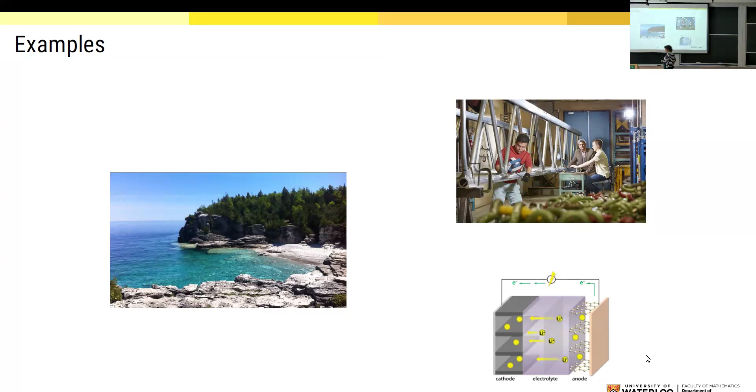And then this is a diagram of a lithium cell, which I did some work on a few years ago on estimation, and that's a really hard estimation problem. Again, we have really only a measurement of the voltage at the terminals, and you want to try and figure out what's going on with very complex electrochemical dynamics. These are actually all PDE examples, which is what I usually work on, but this is actually the last time I'll mention PDEs in this talk, because I realize that the whole estimation issue is really difficult.

So just as a basic problem description, and these are all really nonlinear examples. So I have some nonlinear system of ODEs, and I've got an initial condition, and I've got a measurement. And just for the sake of simplicity, I'll say the measurement Y is a linear function of the state X, but that's not important at all.

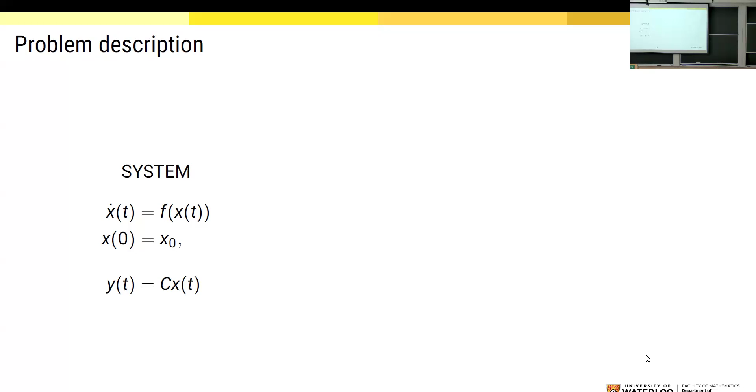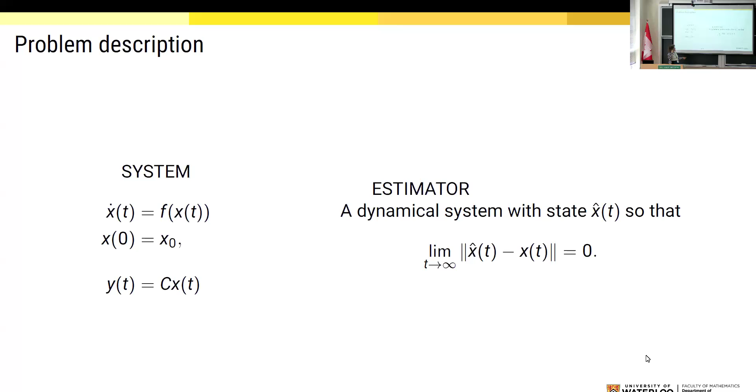What's an estimator? An estimator is another dynamical system which you construct in some way, which has some state X hat, and the key property is that as time goes on, the state of the estimator has to converge to the true state, okay? So the obvious thing to do, if you hadn't really worked in this field at all, was you'd say, okay, I have a pretty good model, so I'll just construct a model of the system and use that.

But this is terrible. First of all, if the initial conditions don't match, you're not going to get X hat to be an estimate of X, right? And if I knew the state at time 0, then I would probably know it at later times, and I wouldn't need an estimator. So this really doesn't work.

Also, can I forward on this? Yes, I can. It ignores the fact that I do have measurements. I don't know the whole state, but I do have these measurements, right? So you should use them.

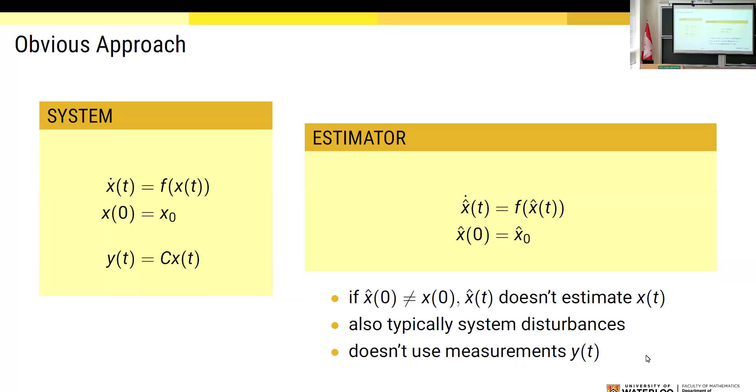So really the best result for doing estimation is for a linear system, which is well known in the systems field. Minimum variance estimator design. So I try and design so that I minimize the covariance of the errors, okay? And supposing I have linear dynamics, and also I have a nice setup. I have Gaussian noise, and the noise on the model and the noise on the sensors are independent, okay?

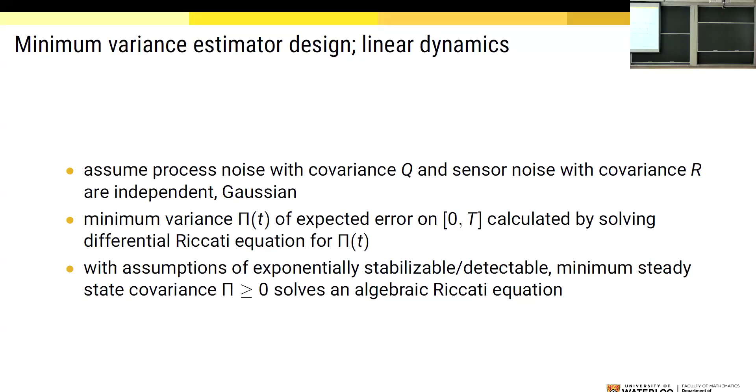This was solved around 1960 by Bucy and Kalman, and we can figure it out by solving a differential Riccati equation in finite time. And if you take it infinite time, you get an algebraic equation. At the time, there was a bit of skepticism because people were saying, you've replaced one problem I don't know how to solve by another problem I don't know how to solve, this algebraic Riccati equation. But now we can solve these with thousands of variables, and that's no longer considered really interesting. But this is what you get. So this is a nice setup.

Does this thing have a light on it? No.

So I have the noise, right? I have process noise, which would be like disturbances or allowing for errors in my model, and I have sensor noise, because no sensor is perfect, right? They always have errors, okay? And the optimal estimator, if I had nice noise and linear dynamics, has got this really nice form.

You've got really a copy of the original dynamics, and then it appears in this really nice form for free, even though we didn't pose it in the problem. For free, the optimal estimator is actually in feedback form. So I feed back an error between the actual measurement and the predicted measurement. And what you scale it by, this gain or filter here, you get from solving this algebraic Riccati equation.

And what is really important is that the error between the estimate and the true state converges to zero. In fact, it converges to zero exponentially, okay? So I'm not actually trying to construct a copy of the system. I'm not trying to identify the system. I'm trying to construct another system with stable error dynamics, okay? And we have that in this nice case, right? And the discrete time case is exactly the same. I just wrote it this way because it's a little easier to explain.

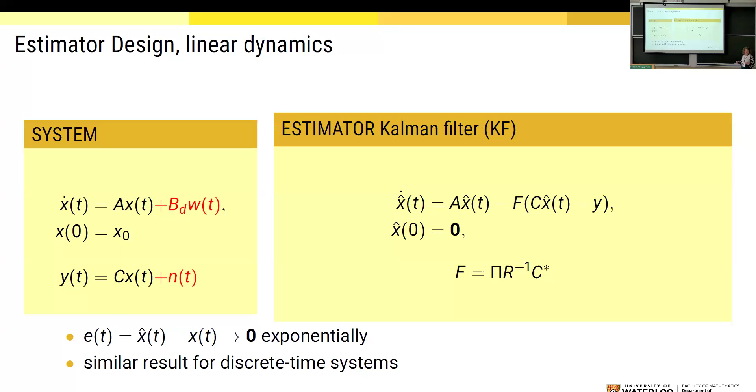You can do unscented Kalman filtering. There's a lot of other approaches, but they're a little on the ad hoc side. Another thing that people might commonly do is think, okay, I don't know the optimal form, but maybe I'll assume I'm going to feed back the error in the prediction, and I'll try and figure out the optimal F, okay? So there's a lot of numerical approaches, but not much in the way of theory.

So the long-term goal of my research at the moment is to improve state estimation for nonlinear dynamical systems, okay? And what I'm going to talk about now is using neural networks, particularly recurrent neural networks, to construct minimum variance estimators for nonlinear systems. So I'm curious, everyone here is very excited about using machine learning. Is this one of the problems where machine learning could be advantageous? I know there have been some really good successes in solving optimal control of nonlinear systems with neural nets, so it sort of indicates that estimation might be another one.

We did some earlier stuff. We looked at straight Jordan recurrent networks. Here we're going to compare a Jordan, a long short-term memory, and an Elman type to a traditional Kalman filter, just to see how they stack up. And we have some results on verifying the error convergence.

So a lot of people have been doing work using neural nets to predict states, okay? A lot of people will use only the data. They don't have a model, which is often what you have to do. You don't always have a decent model. And that's what we called in the old days system identification, okay? So it's a different kind of problem.

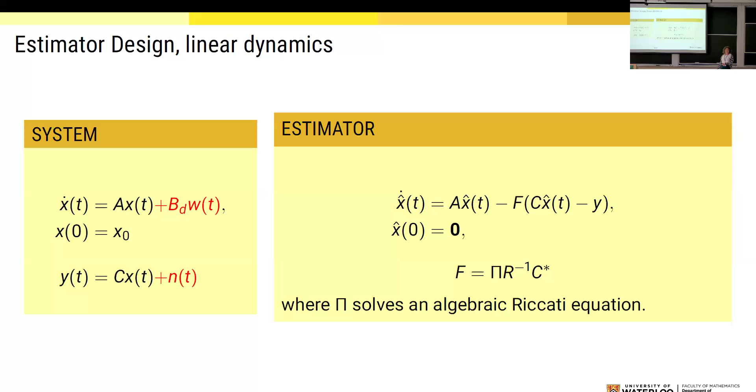So you tune it, again, using learning, okay? And I really found one paper, so someone was really using an optimal type approach, but using some theoretical results from Art Krener from about 20 years ago. But it's got a lot of assumptions. But I guess you'd call that a physics-based approach because it uses a Hamilton-Jacobi-Bellman equation.

What we did just here was we tuned the networks to minimize the error variance, okay? So the mean squared error of the estimate, which is a fairly straightforward problem. So the two architectures we looked at were Elman, which are pretty popular, and I'm just showing the straight Elman because the long short-term one is too complicated to draw.

What you do in Elman as opposed to a standard recurrent network is you take the hidden layer from the previous time step and update it. So you're sort of updating the hidden layers here. There's an approximation theorem, which Miroslav was just talking about. It works for dynamical systems, for ERNs. Yeah, and we're focusing on LSTMs because they should be a little more efficient for training.

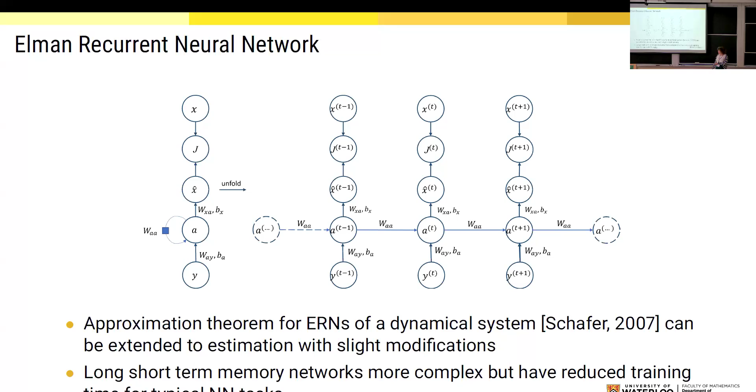A Jordan network is not as widely used, but we looked at that because it seems much more natural for a dynamical system. Because in a Jordan network, the recurrence is you're taking the output. So what's the output in the system? You're feeding it in the current measurement, right? And then it goes through the hidden layer, and then you get a predicted state, and then that is used to update the loss function, which is the sum of squares of errors, okay? And then we get a new predicted state, okay?

And in a Jordan network, that output from the previous layer, which is the predicted state, is used to update things, which is very much how a dynamical system works, right? The state is actually the memory of the system, and that seems a very natural update. So that's why we looked at that. Yeah, that's it.

So we just looked so far at 3 fairly standard and fairly simple examples. One was linear because we have the optimal answer to compare it to, the Kalman filter. And that's just a system of connected springs, and we discretized them. So we did the comparison to the discretized system. We're pretending the world is discrete time. So discretized springs.

So it's 10 second order systems, so it's 20 states, okay? And there's parameters, and then the measurement vector, we're assuming you could measure all the positions, but not the velocities. And of course, there's measurement noise on the measurements, and process noise is included in this. I just didn't write it in, okay?

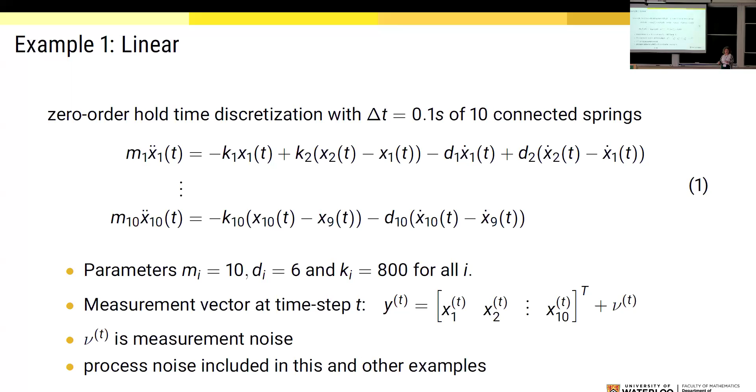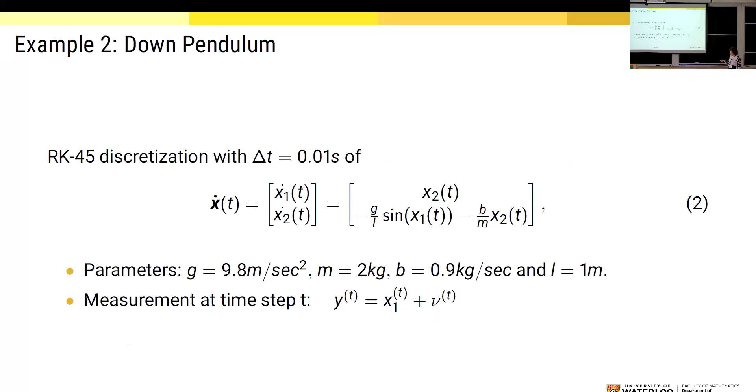The second example was another classic one, the pendulum, right? And we used Runge-Kutta 45 to discretize it. There's parameters, and the measurement is just the position, right, plus noise. And the third example was a reverse van der Pol oscillator. It's another second order system. Again, we just measured the position, a noisy position measurement, okay?

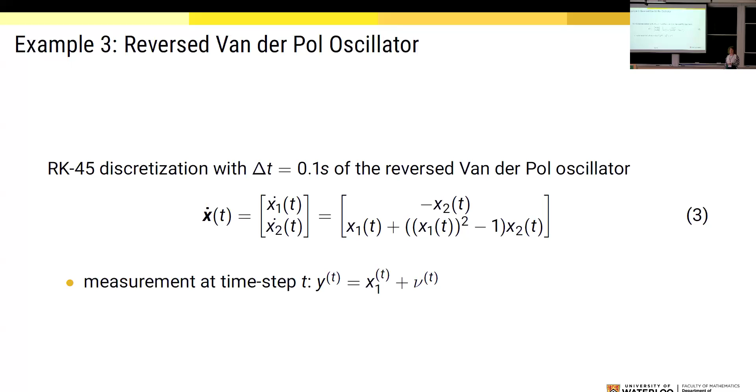And here's a table, what did we get? So the normalized mean square error. So for the linear example, we compared it to a Kalman filter result, and they look better, but that's just over the data we used, right? But pretty comparable. And then we compared the 2 nonlinear examples to the results for an extended Kalman filter, which is based on linearizing around an initial condition. And it's actually significantly better than the extended Kalman filter, which was encouraging, suggests this is actually worthwhile.

But what was even more encouraging is we did testing with initial conditions well outside the training region, right? Because the idea, this is really why you want to be using the model in constructing an estimator, is that hopefully you end up with an estimator that will give you reasonable predictions outside of where you were able to train it with data, right? So that if something happens that you didn't already have data for, you're going to get a reasonable prediction.

So anyway, we tested it with initial conditions outside of the training region, and there, okay, the Kalman filter is way better for the linear example, which is not surprising. But both the Jordan and the Elman networks were much better than the extended Kalman filter, which is suggesting that it's actually learning the nonlinear system much better.

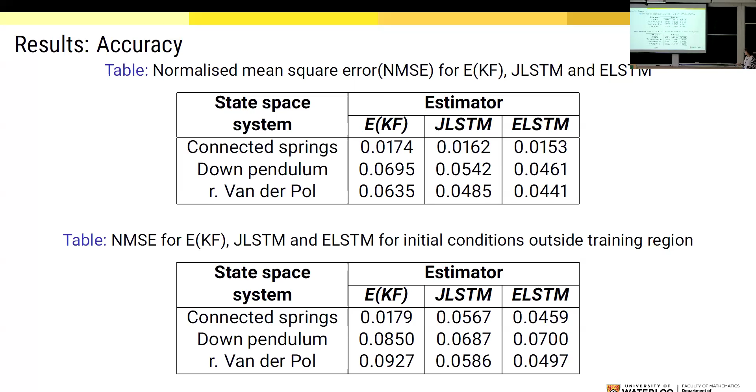So that was good. And the training time, this was something that we need to look into some more, but the Jordan system seems to have shorter training time, which is indicating that maybe the architecture is better for learning a dynamical system. Something we need to keep looking at.

And then testing time, not very surprising, is that the neural net is much, and people talked about it this morning, right? The neural net is much faster than the traditional architecture, which is one reason for looking at this, right? Because eventually, if you're doing this on a real problem, you're going to want it to run in real time. So you want something that's not only accurate, but will compute quickly, right? Maybe even on, like someone talked this morning about, FPGAs.

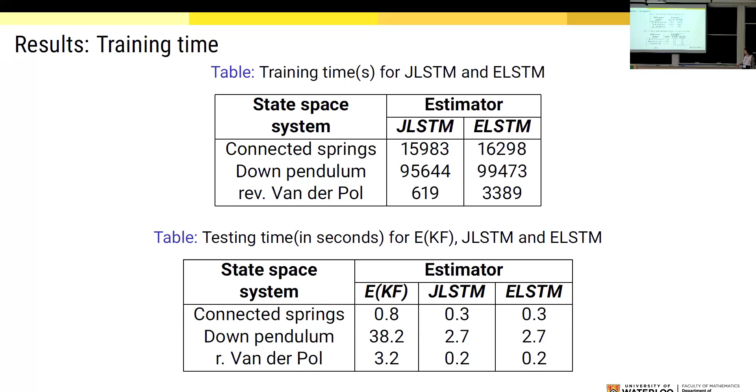Okay, so summary so far, right? We tested Jordan and Elman networks on 3 examples and compared them with traditional approaches, and they seem to work really well. Particularly on the nonlinear system, they were better, which is good. And Jordan seems to have a smaller training time, so we're going to continue looking at that.

So now I want to talk about stability of the error dynamics. So remember, again, we're not just trying to copy the system, right? We're trying to get something where I have stable error dynamics. So here's the system. Oops, hang on, let me go back. Okay, so there's my system, and then here's just generic, right? So my estimator is some other dynamical system with the measurements as an input, right?

So then the error dynamics, and this is written in discrete time, right? It's the difference between the true and the estimated states. So we end up with this. This is part of the problem of establishing stable error dynamics for nonlinear systems, because in a linear system, the measurement part separates out really nicely as an external input, whereas here it's mixed up in the dynamics.

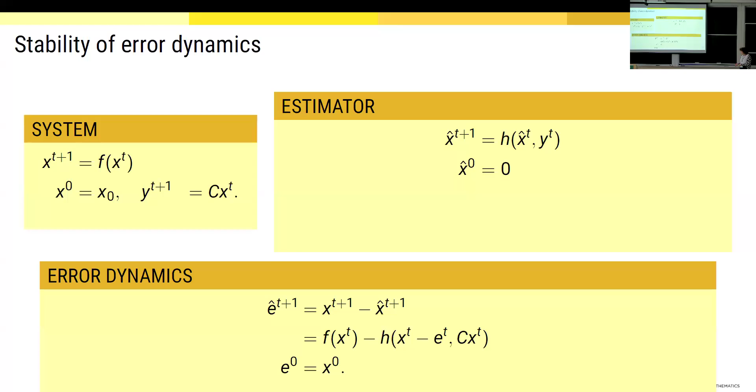So if you look at that, you think, okay, we can regard this, I shouldn't have a hat on, it's just the error, right? So you could eliminate x hat from the expression, right? So now I have an expression for the error dynamics, right? And I can regard x, right, the true state, as the input for the point of analyzing the stability, okay?

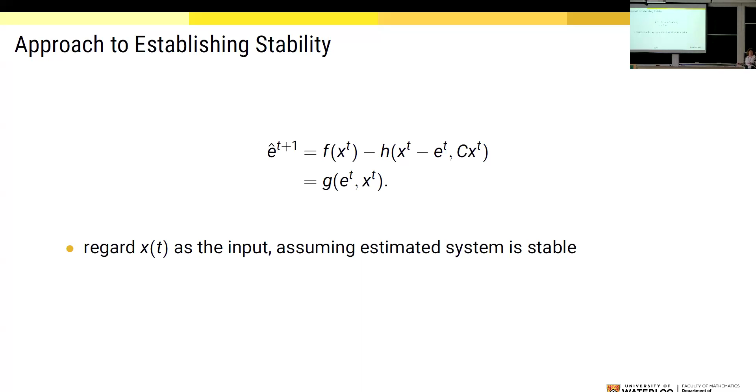So I'm going to regard x as the input, and I'm going to assume the estimated system is stable, which makes things better. And it's actually reasonable because a lot of natural systems are stable, number one, and number two, if they're not, you heard about in the previous talk, you're going to construct a controller using state feedback to stabilize it, and then the estimator is another step. Okay, so we're assuming the system's stable.

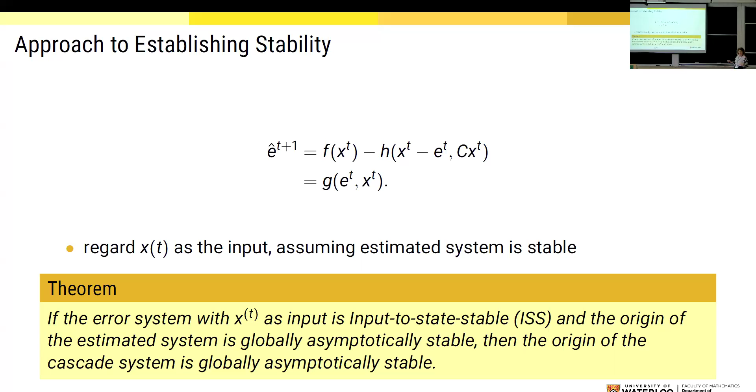Okay, so we'll get into ISS, which is some work done by Eduardo Sontag, who's speaking later this afternoon, which was really the key to getting this to work. If the error system is input to state stable and the origin of the estimated system is stable, right, then the origin of the cascade system consisting of the estimator plus the original state is going to be asymptotically stable, okay? So how are we going to do that?

This is a bit of stability theory for the rest of the room. I'm going to go real quick. So a continuous function is a K function, basically, if it's increasing with the argument, okay? In K infinity, it keeps going up. And then a KL function is increasing with respect to the first argument and decreasing with respect to the second argument, okay? So it's what you want for a stability Lyapunov function.

So that's like a nice theoretical result, but we can actually use it here because you can translate them into inequalities, okay? And inequalities are nice criteria for working with on a computer. So it's going to be an ISS Lyapunov function if, first of all, V is bounded above and below by K functions of the error state, right? And this is the one that means that it's ISS: the subsequent time minus the previous time is less than or equal to some negative K function plus gamma on the state.

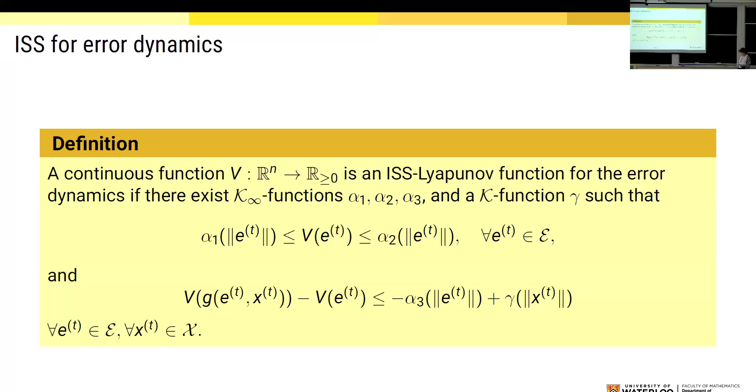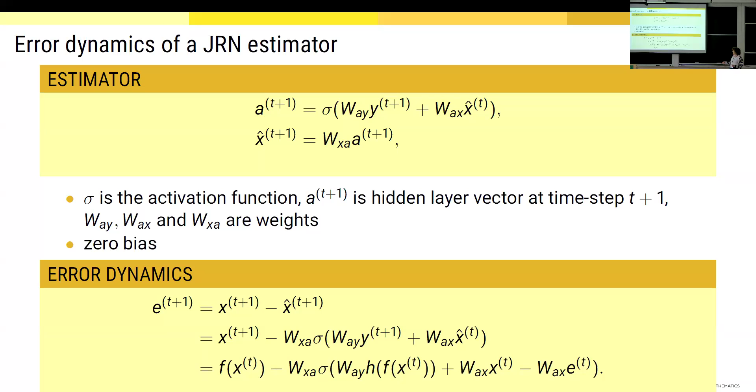So what we tried to do in the last stage, and Rukan did a lot of this work, is here's my estimator. We just did this with a simple JRN network. So we have a really simple neural network with one hidden layer here. So then the error dynamics look like this: the original dynamics minus whatever the neural network's output is. So I have another discrete time system.

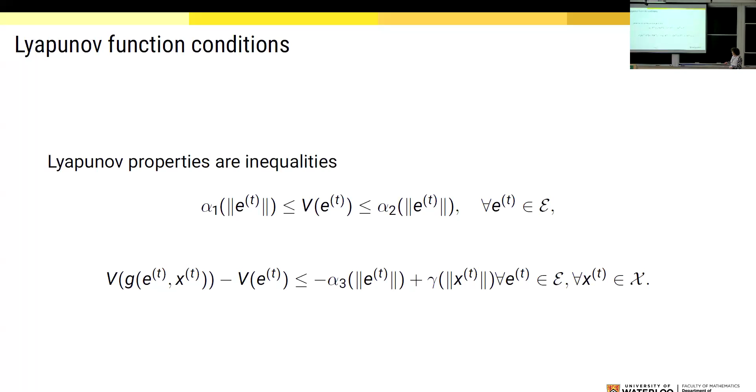Hang on, let me go back. Okay, so I need to find an ISS function for that system. The Lyapunov functions are inequalities, right? So what we do is two stages, actually. There's a second neural net part, which is that we're going to try and find a network that will be a Lyapunov function. So we're going to train the neural net to learn a Lyapunov function.

This is based on earlier work of Chang in 2019, and then also Jun Liu, Yiming Meng, who was an earlier student of John's, and Mike Fitzsimmons and Rukan Zhu. So anyway, we have a fairly simple feed-forward neural net. We have weights and hyperparameters. So we're going to solve for the hyperparameters. There's two stages here.

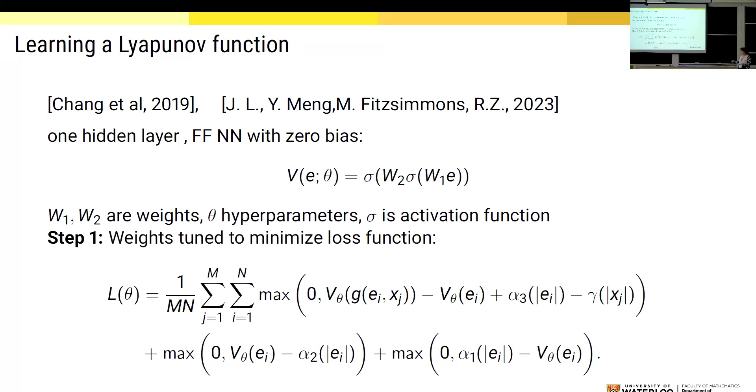So the first step is the network tries to find weights to minimize the loss function. And the loss function penalizes violations of those inequalities, right? So if that ends up being zero, you're going to end up with something that it thinks is a Lyapunov function. So that's stage one. And then stage two is verifying that it actually works.

So we check what's called falsification constraints. You set up a series of inequalities which, if they are satisfied, it's not a Lyapunov function. And this we can do because it's a very specific class of function. So we can use a satisfiability modulo theories solver. We use dReal here, which can check to see if it's possible for these to be satisfied. And if it returns false, then you can be assured that that's in fact a Lyapunov function. So that's stage two.

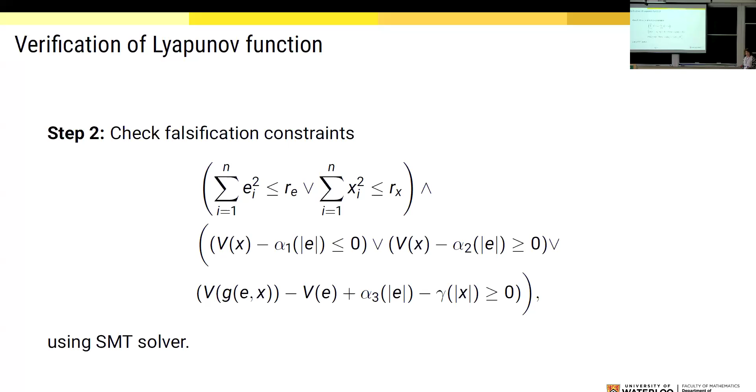So if I can recap this stage, oops, let me go forward. The first stage was to learn an estimator. And then the second part was to check that it is an estimator in that it has stable error dynamics. And to check that, you first train a totally different neural network to learn a Lyapunov function, and then check to make sure that in fact it is a Lyapunov function.

So this is just work we've done the last year. We're going to work on reducing the training time; we have a better computer coming. And we want to work on higher order systems and explore whether or not Jordan really is the right architecture, and extend our work on establishing stability, which as I mentioned is key for an estimator, for actual LSTMs and more complicated architectures.

Just as in control, often we're trying to find an optimal control, but more important than optimality is stability in the control system. It's the same thing in estimation. I'd like to find an optimal estimator, but if the error dynamics are not stable, meaning I'm not converging to the true state, then it's toast. So sometimes you might want to settle for suboptimal but reliable. And we're also going to look at what I guess would be called a physics-based approach. Maybe we can bring in some HJB here.